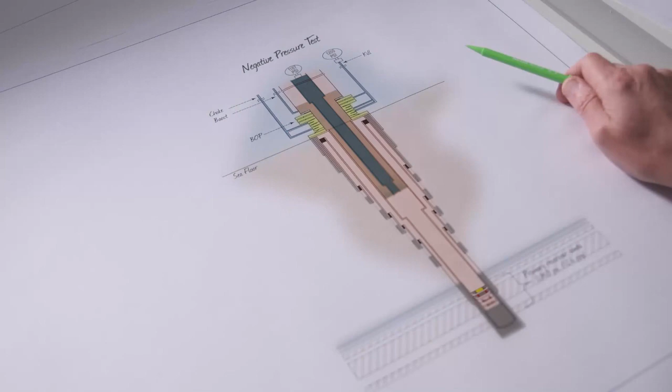They followed the spacer with 352 barrels of seawater, which should have displaced the tail end of the spacer to just above the BOP. They then closed the annular BOP. The U-tube pressure on the drill pipe was 2,325 psi.

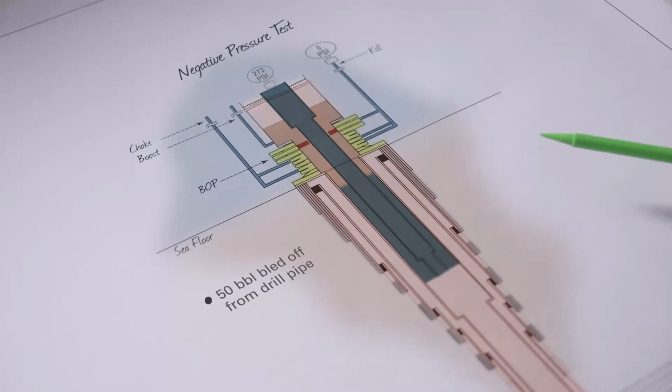Next, they bled off the drill pipe to try to get the pressure to zero. They bled off 50 barrels, which is 5 to 10 times as much as would be expected. This suggested something was not right. So after some investigation, they found the mud level in the riser had dropped, indicating the annular was leaking.

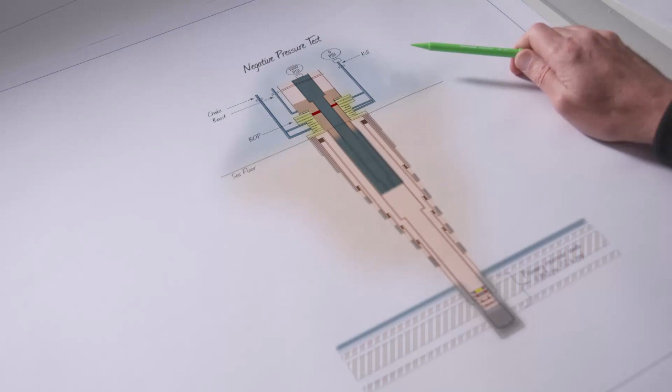So they increased closing pressure on the annular to make it seal, topped up the riser with 50 barrels of mud, and monitored the well to make sure the annular was now sealing. But now, instead of being above the BOP, the LCM spacer was strung out across it, and as we will see, this would have consequences later on.

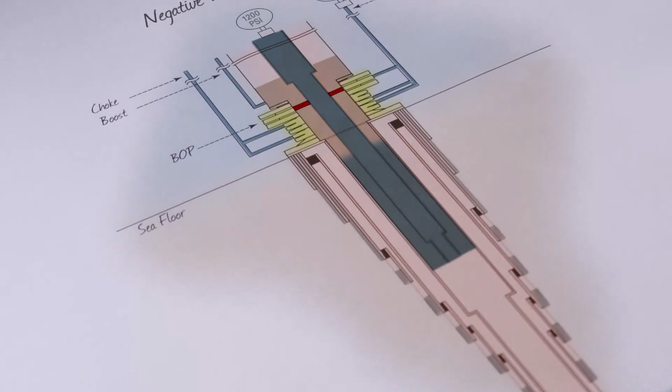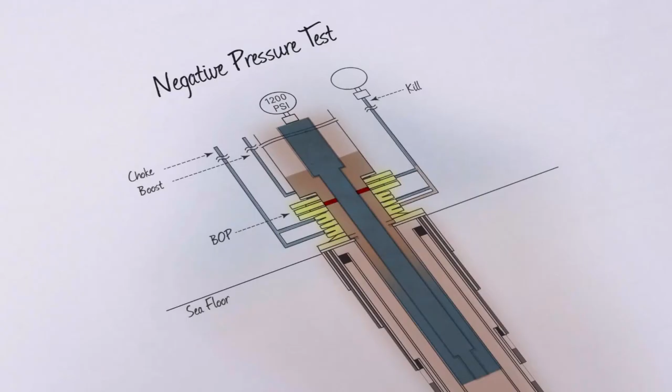With the annular sealed, they continued with the negative test. Drill pipe pressure at the start was 1200 psi. They bled off 15 more barrels, and the pressure reduced to zero, as expected. In fact, the bleed-off volume was the first visible indication of an integrity problem with the well.

But the volume rang no alarm bells because they hadn't calculated how much fluid was expected to be bled off to reach zero. The extra volume needed would have indicated that the test had failed, because later calculations showed that it should only have taken 3.5 barrels to bleed off the pressure, a quarter of what they actually got.

For the first time since those formations were drilled, the well was underbalanced and started to flow. The other 11.5 barrels bled off was an influx of hydrocarbons into the production casing through the shoe. They had in fact induced a kick. But the opportunity to recognize the kick may have been missed because of a procedural change.

The well site leader realized that to suspend the well in accordance with the permit, they needed to perform the negative test via the kill line, not the drill pipe. So they reset the test and essentially started again before the bleed-off volume was questioned or a rise in pressure in the drill pipe was noticed.

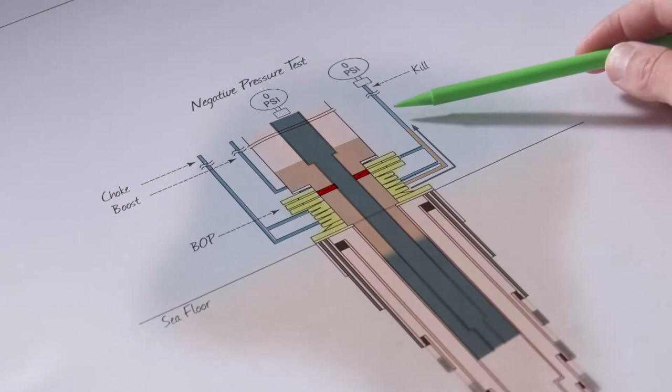Following the well site leader's instructions, they opened the kill line and observed some fluid coming out of it. Exactly how much is unclear. Some eyewitnesses said that flow eventually stopped, but others said that fluid was still spurting out when they closed the line. If the test was successful, there shouldn't have been any flow, as the drill pipe had been bled to zero.

They discussed the flow they'd seen and decided to open the kill line again, but first they rerouted it to the mini trip tank. They opened the kill line again and monitored it for 30 minutes, and this time there was no flow. But in the meantime, the drill pipe pressure built up to 1400 psi.

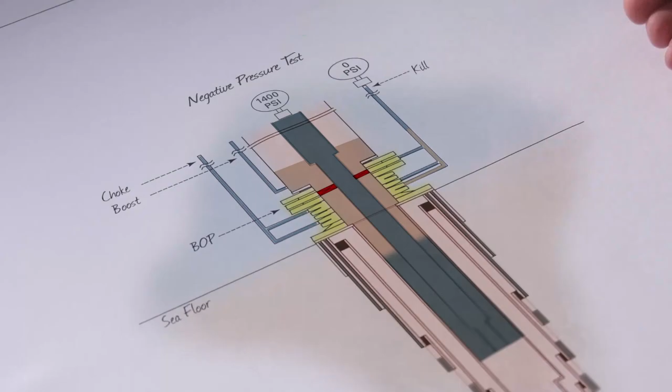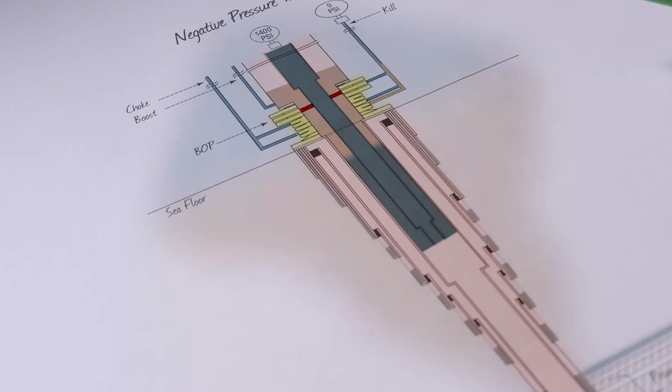If all was well, this would not have happened. The test did not apply any additional fluid, so there should have been no pressure source. The most likely source was a formation fluid influx. The well had flowed. The drill pipe and the kill line were both filled with water. They should have been at the same pressure. The readings didn't match this expectation, so the rig team tried to understand why.

This is a moment where a critical decision was made. With hindsight, these anomalous readings suggest that the test had failed and the well had flowed. To understand why the readings weren't acted on, we need to look at the decision-making process.

First of all, bear in mind that although this was a challenging job, everything seemed to be drawing to a satisfactory conclusion. All indications were that the difficult cement job had gone well. The floats had held, the positive test had been good, and there was no fluid coming out of the open kill line. The job was nearly finished.

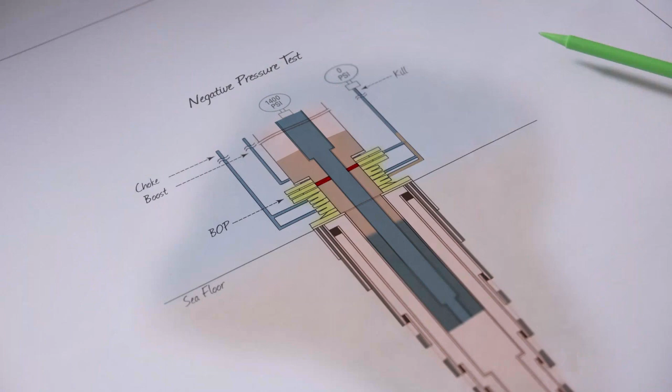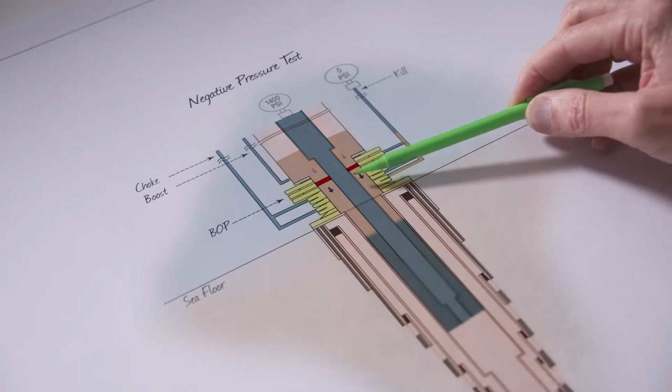There were 2 senior BP well site leaders supervising the negative test, and they had a discussion about the anomalous readings with the senior rig crew. And a Transocean tool pusher and driller offered an explanation, saying they had seen this phenomenon before, and it was called the bladder effect. The idea of the so-called bladder effect is that the heavy mud in the riser can exert pressure through the annular onto the fluid below it, because the annular is a flexible seal.

This appeared to explain the anomalous readings. With no fluid having come out of the kill line for 30 minutes, the negative test was deemed successful. This is one of the critical decision points in the series of events, because with hindsight we know that the negative test had failed and hydrocarbons had entered the production casing. Understanding this chain of decision-making is crucial to learning from the accident.

Note that the bladder effect is not known to exist. It's not a proven phenomenon, and in hindsight it was not a viable explanation for the anomalous pressure readings. This could have been confirmed by bleeding some of the pressure from the drill pipe. If pressure had started to rise again, it would have indicated the negative test had failed.

Instead, the well site leaders and the senior rig crew accepted the bladder effect explanation. There was a problem to solve. They had what seemed like a logical, convincing and benign explanation. Unfortunately, that explanation turned out not to be true.

Putting aside for a moment the events on the Deepwater Horizon, in our operations there are often situations where the observed data is hard to explain or contradicts what we believe to be happening. In those situations we need to be cautious of a phenomenon known as confirmation bias, which is the natural human tendency to focus on information that confirms and supports one's preconceptions, and to discount other information.

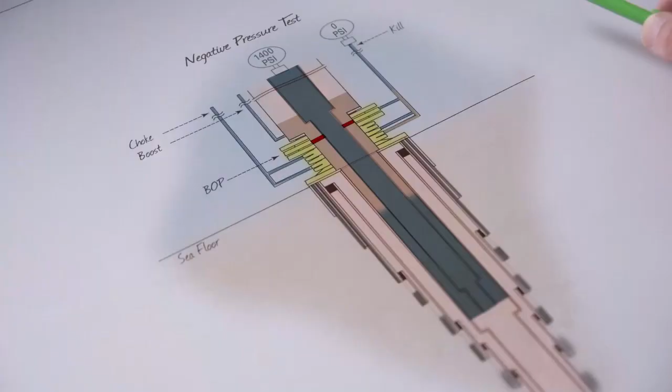We do not know why there was no flow out of the kill line. There should have been with 1400 psi on the drill pipe. If they'd seen flow, they would have known there was a problem. One credible explanation is that the kill line had become plugged with the LCM spacer that had leaked into the BOP through the annular at the start of the test. The spacer was an LCM pill made from Form-A-Set and Form-A-Squeeze, which is a thick, gungy, solids-laden pill.

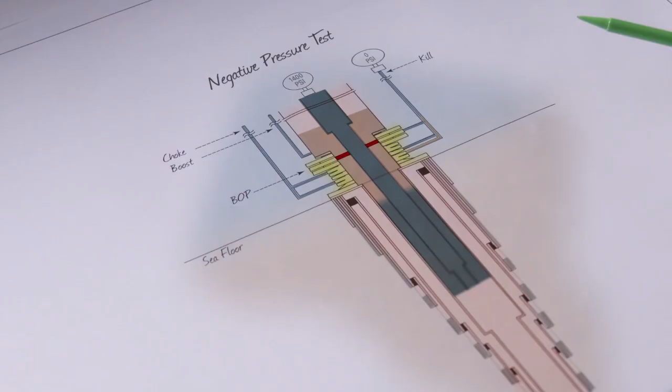It was used because it was in the mud pits, where it had been kept in case it was needed during drilling. But after drilling, they needed to dispose of it. And once it's been pumped down the well, regulations allow it to be disposed of overboard. So using the LCM pill as a spacer enabled this disposal solution. And of course, the LCM would not have been near the kill line if the annular hadn't leaked.

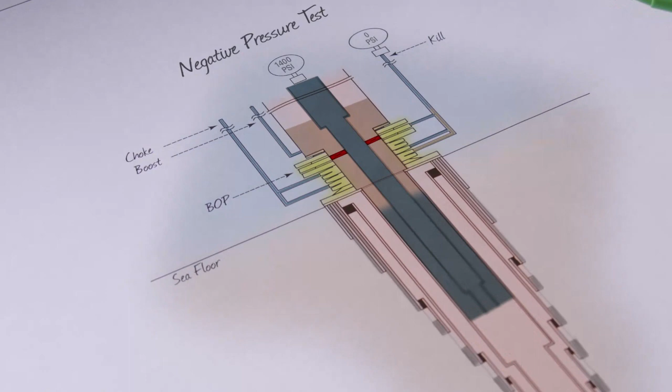It's also possible that when they rerouted the kill line to the mini trip tank, a valve was inadvertently left closed, so the kill line was never opened to the production casing pressure in the first place. We can't know for sure why there was no flow from the kill line. Certainly the type of spacer plus the leaking annular is a logical explanation.

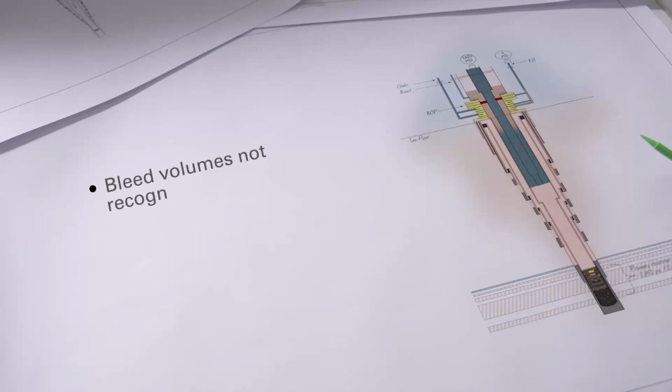The sequence of events surrounding the negative pressure test is one of the key findings of the investigation. The unusually high bleed volumes were not identified as a problem. The anomalous pressure readings, 1400 psi on the drill pipe and no flow from the kill line, should have rung alarm bells in the supervisors' heads. Instead, a possible explanation was assigned, but not tested.

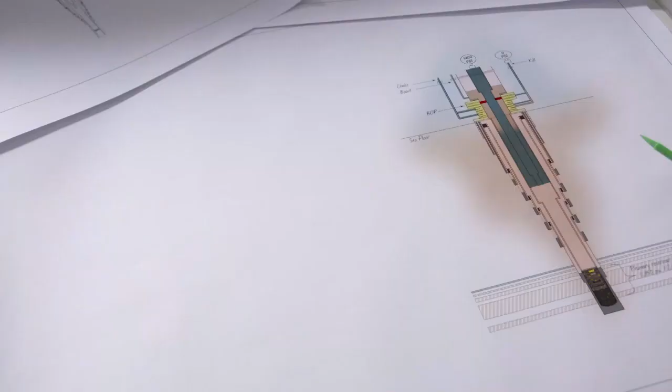The approved method of testing was not correctly identified before the test started, leading to the test being halted and changed halfway through. This confusion made it easier to miss the failure of the first test. The pass and fail criteria were not clear. The test was incorrectly accepted as successful, despite indications to the contrary. The decision to call the test a success, in spite of the pressure anomalies, was made on the rig, with little or no involvement from the onshore team. 3 preventative barriers had now been breached: the annular cement barrier, the shoe track, and the negative pressure test.

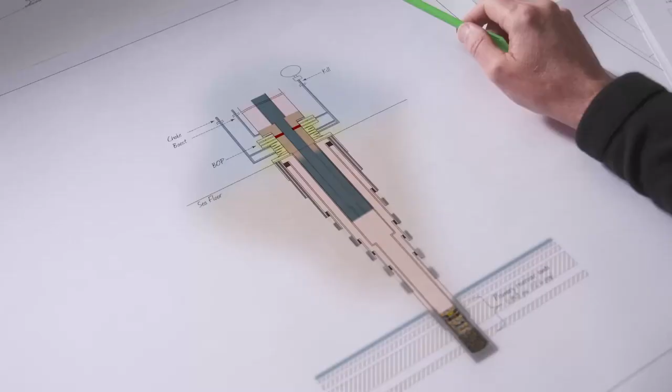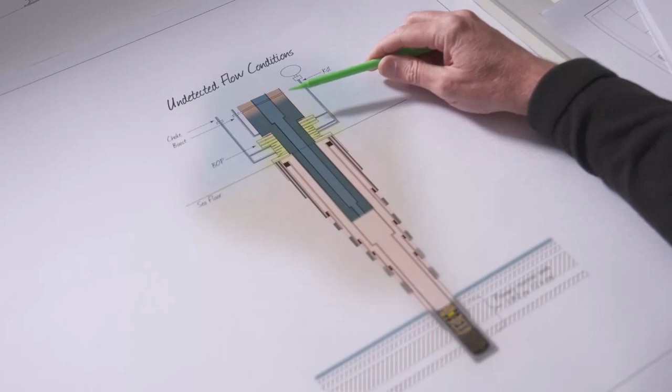After the negative test, at 19:55, the suspension program continued. With both the positive and negative pressure tests apparently successful, they opened the annular. As soon as they did that, the well was overbalanced again, so further hydrocarbon flow was prevented. At 20:02, in preparation for suspending the well, they began displacement to seawater to get the heavy mud and spacer out of the riser. The primary well control barrier included the mud in the riser that they were now removing.

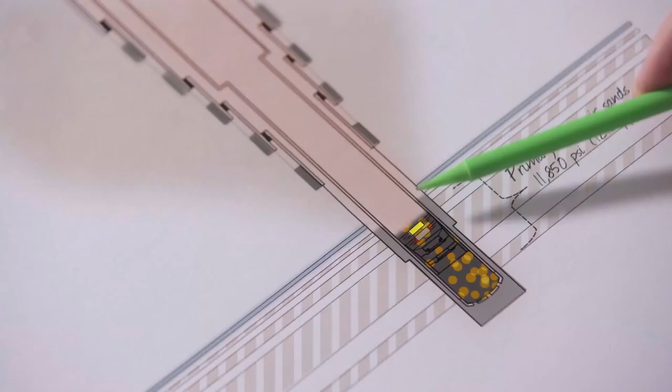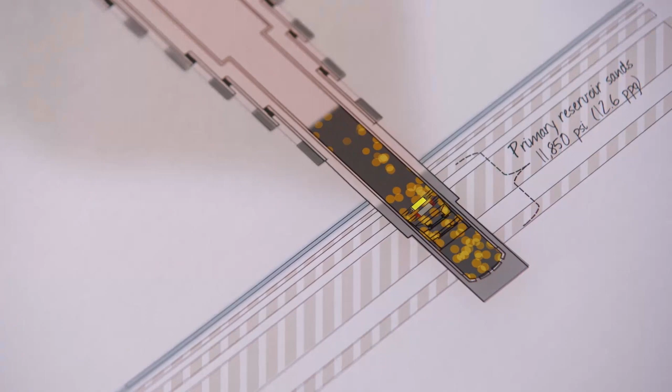50 minutes later, enough mud was removed for the well to go underbalanced. Hydrocarbons began to flow into the well again. Returns of fluid from the riser now exceeded inflow as the rising hydrocarbons displaced fluid up the well. The pit level started to increase. The pit gain may have been missed because at this point they decided to empty the trip tank down the flow line and into the active tank. So seeing a pit gain wasn't surprising. After all, they were adding excess fluid themselves. By emptying the trip tank when they did, they made effective monitoring of the well more difficult.

At 21:02, pressure began rising in the drill pipe. But as they were pumping seawater at a constant rate, and the mud in the riser was being displaced by seawater, the pressure should have been falling. It was rising because the lighter kick fluids were replacing heavy mud below the drill pipe.

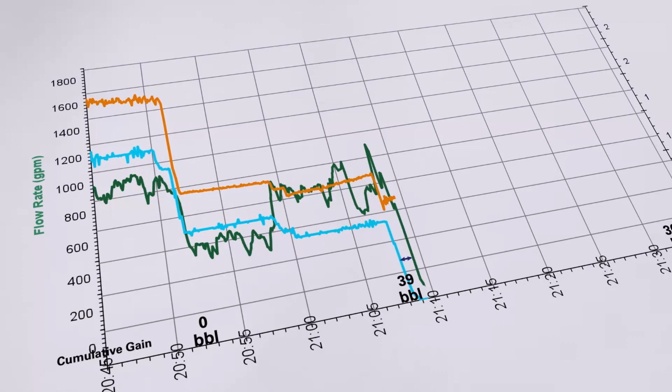By 21:08, the spacer was at surface, so they shut down the pumps so that they could do a sheen test to check there was no oil in the spacer before dumping it overboard. Two key things happened. Instead of stopping in seconds, as it should have done when the pump was stopped, the flow out of the riser continued for 1 or 2 more minutes, pushed by the rising hydrocarbons in the well. And the pressure in the drill pipe began to rise for the same reason. With the pump shut down, there was nothing on the rig to generate this excess pressure.

It was now 5 hours since the first influx during the negative test, and no well control actions had been taken. Remember, these were all smart, experienced professionals just like you. Things that seem clear in hindsight may have been missed in the efforts to finish a difficult job that appeared to be going to plan, given the cased, cemented and tested wellbore. Computer modelling suggests that up to this point the influx was relatively small, perhaps 30 or 40 barrels. The influx was flowing at quite a slow rate, but it was accelerating.

At 21:15, with the sheen test complete, the pumps were restarted. Because there was believed to be no risk of oil contamination, flow was rerouted straight over the side. At this point, there was no way to monitor flow volumes or rates out of the well. As they continued pumping, the pressure continued to rise steadily in the drill pipe, and the most likely reason for this was that the well was flowing. But no well control actions were taken. All the returns were now going overboard.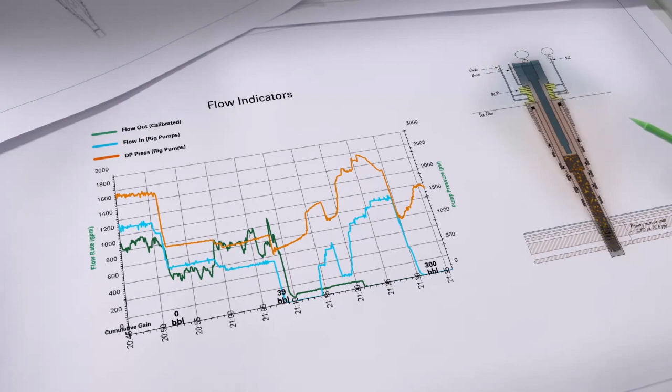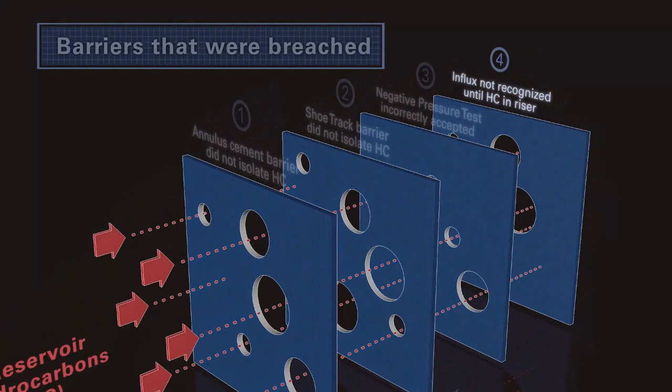At 21:30, they stopped the pumps. While they were off, the drill pipe pressure climbed by more than 550 psi in 5 minutes. The investigation indicated that the well must have been flowing at an increasing rate. Though eyewitnesses reported there was a discussion on the drill floor about differential pressure, no well control actions were taken. Subsequent computer modelling put the total influx at this point at around 300 barrels. A fourth barrier to the accident had now been breached. Lack of effective well monitoring meant no one recognized the influx.

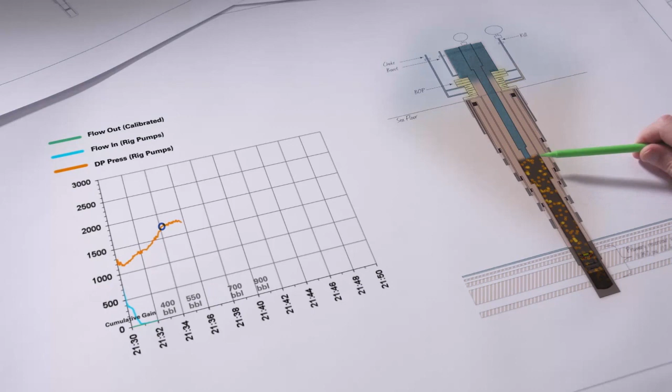With the pumps off, at 21:34, you can see that the pressure in the drill pipe stopped rising. This was a bad sign because it indicated that the influx had now reached above the end of the drill pipe. That was more than a 550 barrel kick. Although people on the rig floor were concerned about the differential pressure, still no one took any action to shut in the well. Concerned by the pressure in the drill pipe, the driller apparently tried to bleed it off, and you could see the pressure drop rapidly. But as soon as they shut the bleed off, the pressure immediately increased almost back to where it had been. The well was flowing. The rate of flow was increasing, but all the returns were going overboard, which made it more difficult to recognize the flow.

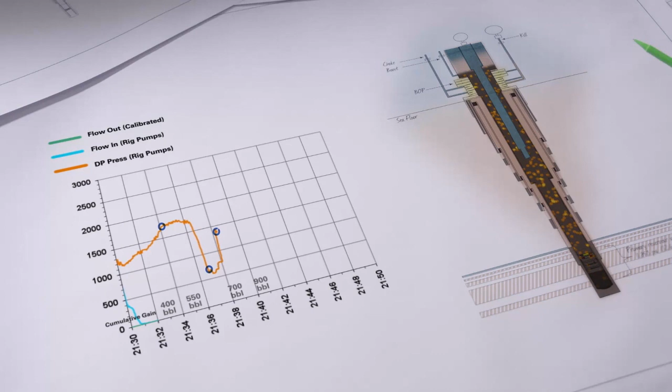By 21:38, the kick size was calculated to be 700 barrels. The influx was now in the riser and above the BOP. This was an absolutely critical moment. The BOP could no longer prevent the explosive hydrocarbons from reaching the surface. At 21:41, mud and fluids being pushed up ahead of the hydrocarbons overflowed onto the rig floor. A minute later it began to shoot up the derrick. Witnesses described it as being like a waterfall raining down from the rig floor to the deck below. Based on the lack of response until this point, this appears to be the first time a well control problem was recognized. It was 3 minutes too late to stop the hydrocarbons entering the riser with the BOP. That barrier had already been breached.

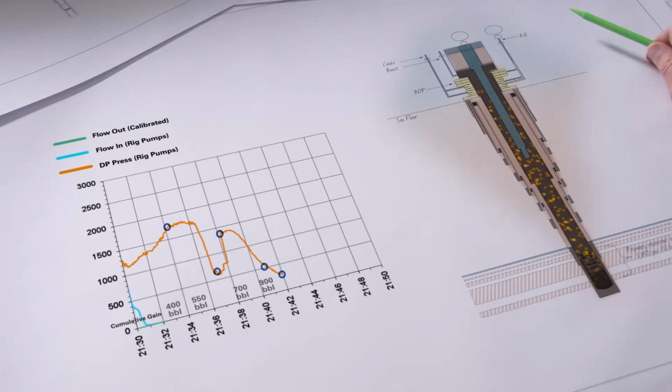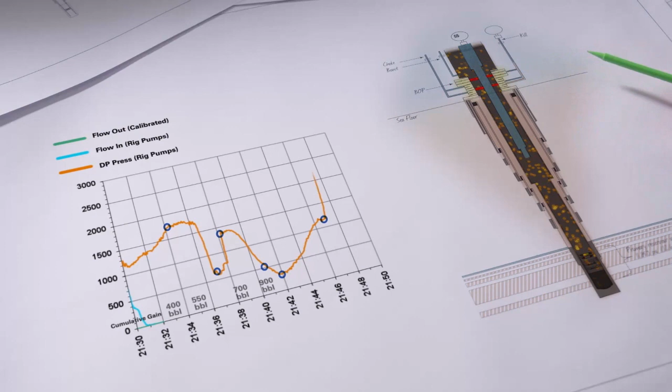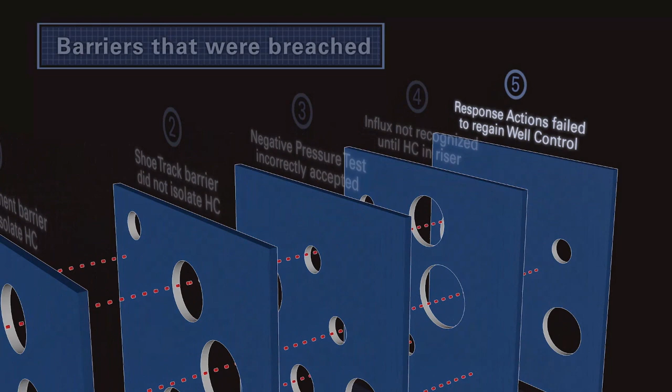If the influx enters the riser, the BOP can no longer prevent it from reaching the rig. In this case, it could still possibly have reduced the severity of the blowout, but it wasn't activated soon enough. The fifth barrier to the accident had now been breached. The response actions, when they were taken by the crew, failed to regain control of the well because the hydrocarbons were already above the BOP.

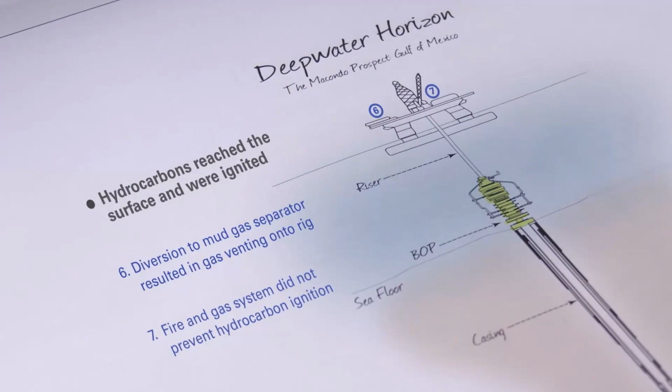Now we will look at the third critical factor, that hydrocarbons ignited on the Deepwater Horizon. To stop mud from raining down on the rig floor, they closed the diverter. It was the right action. It's what it was designed for, to keep the fluids off the rig floor so they could regain control. Unfortunately, the diverter was lined up so that instead of going overboard, the returns went to the mud gas separator.

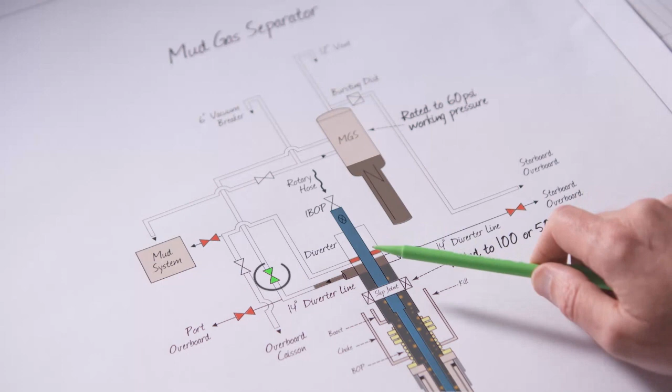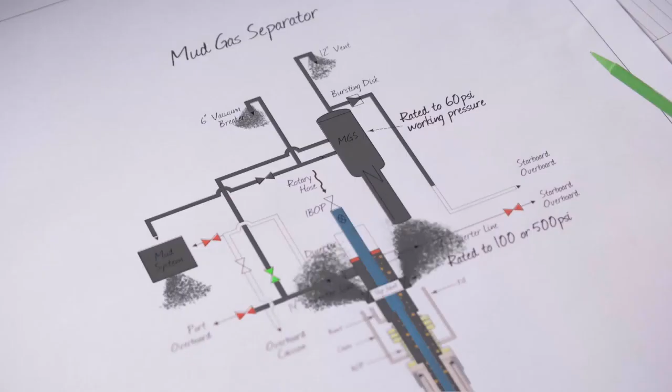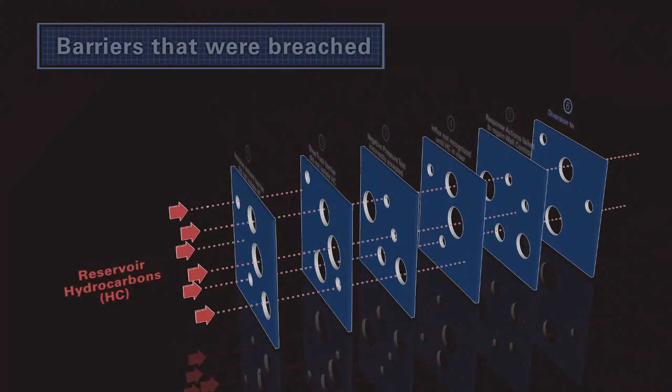The MGS is a low-pressure, relatively low-volume vessel. The flow rate from the well, which is estimated to have peaked at 165 million standard cubic feet a day, was so high it simply overwhelmed the MGS. Hydrocarbons poured from the derrick vent into the mudroom and from the rupture disc, and most likely from the slip joint as well. Within seconds, flammable gases would have covered most of the rig. Thus, the sixth barrier was breached. Diversion to the mud gas separator resulted in gas venting onto the rig.

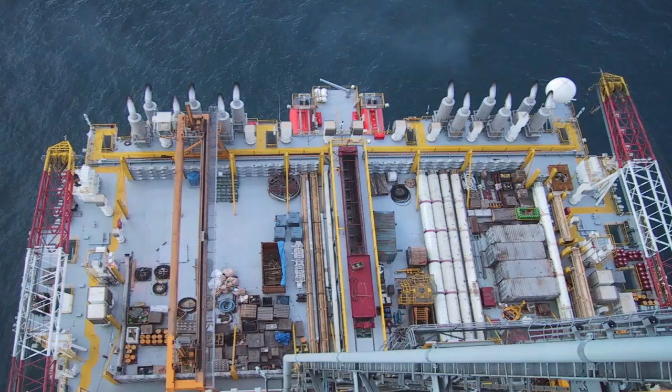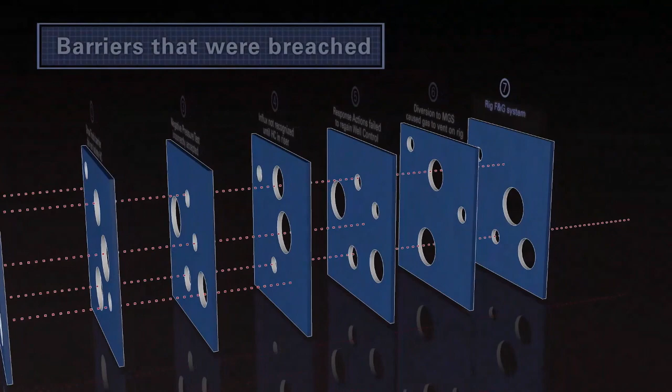The first explosion occurred at 21:49. We don't know the source of ignition, possibly one of the engines or a piece of electrical switchgear. But clearly the fire and explosion prevention systems, although they may have detected the gas cloud, did not prevent ignition. Eyewitnesses reported that at least one engine went into overspeed before the first explosion. This was the seventh barrier that was breached. The rig's fire and gas system did not prevent hydrocarbon ignition, leading to the fire and explosions and loss of life.

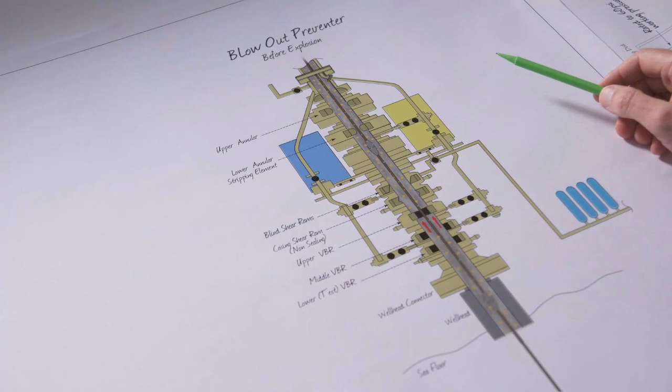Now let's look at the fourth and final critical factor. The emergency well control system did not seal the well. As well as causing major damage to the rig and serious and fatal injuries, the explosions appear to have damaged the MUX control cables to the BOP. At this stage, an annular was already closed, and likely one or more VBRs. With damage to the MUX and hydraulic connections between rig and BOP, the annular would gradually relax open as hydraulic pressure fell. But the VBR would have remained closed. However, the VBR didn't hold.

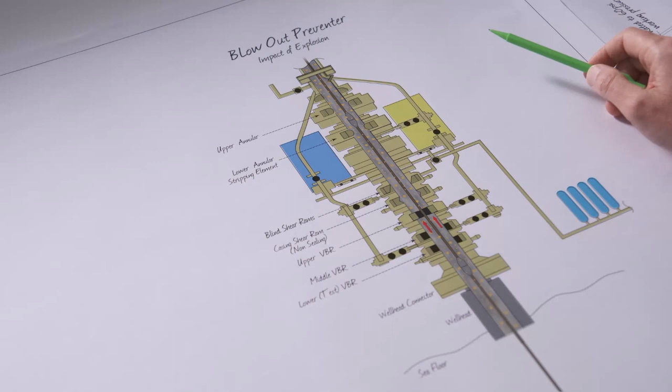The problem was that the explosion blacked out the rig, and because the Deepwater Horizon was dynamically positioned, it began to drift off location. At this point, the seal on the BOP was broken, and uncontrolled flow from the well resumed. There are two possible reasons for this. Either the drill pipe was parted, opening up a pathway inside of the VBR, or alternatively, the drill pipe was dragged through the closed VBR until a tool joint reached the ram and damaged it. Either way, uncontrolled hydrocarbon flow was again feeding the fire on the rig.

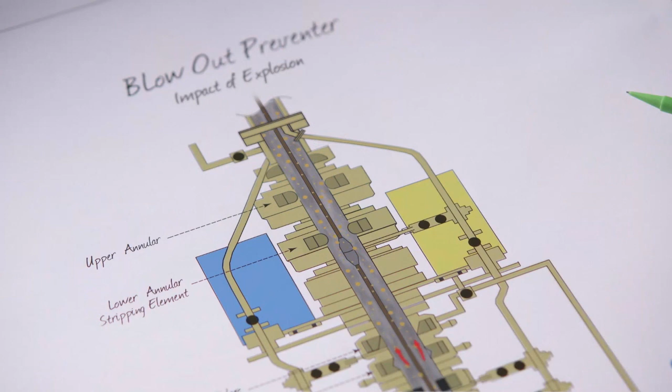At this point, the crew triggered the emergency disconnect system to activate the blind shear rams and disconnect the riser. But this relied on the MUX cables to function, and they had already failed, so the EDS did not activate. When the MUX cables or hydraulic lines failed, the automatic mode function, AMF deadman system, should have automatically triggered the blind shear rams and sealed the well. But this did not happen. Why?

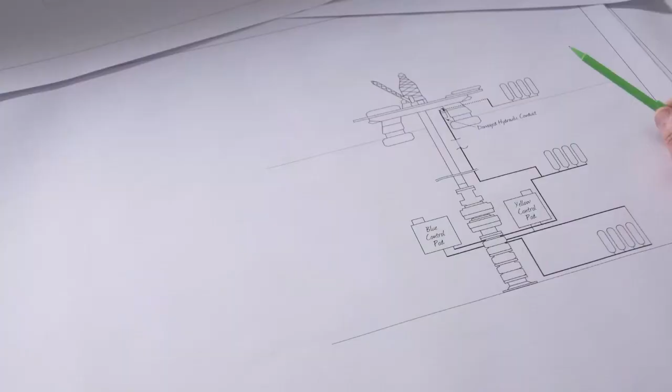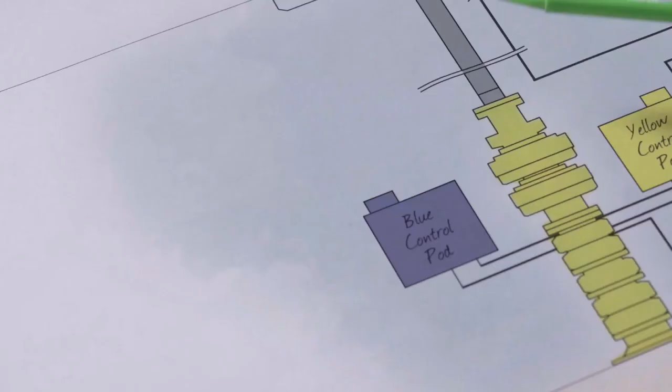The AMF was controlled by two redundant pods. These each contain two 9-volt batteries that power the control electronics, and a 27-volt battery that triggers various relays and ultimately a solenoid valve to release hydraulic fluid to operate the blind shear ram. When the pods were later recovered, the investigation discovered that in the blue pod, one 9-volt battery and the 27-volt battery were either flat or largely discharged to the extent that they could not power the AMF.

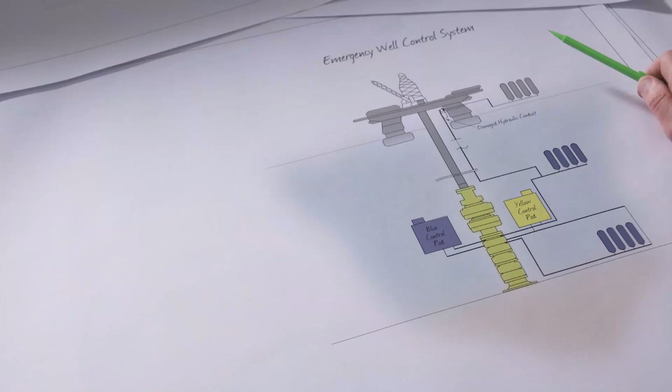In the yellow pod, the batteries were healthy, but a solenoid valve control system had been incorrectly wired during maintenance, so the AMF failed to operate. So, although the AMF had dual redundancy, both control systems failed to operate for different reasons. The AMF deadman system was the last line of defense to shut the well in.

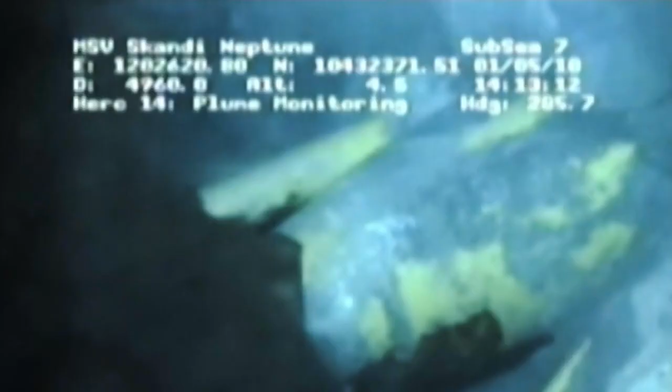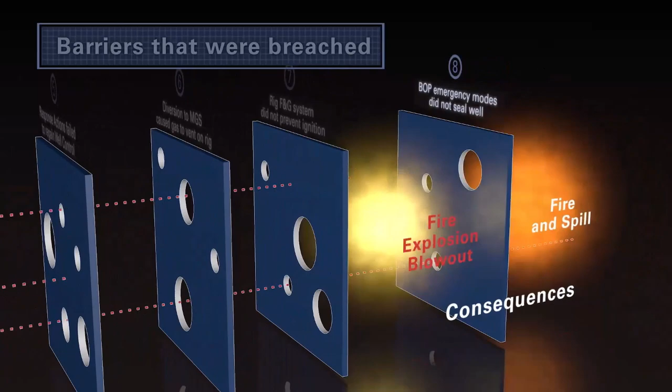Later attempts to trigger the AMF manually using an ROV appeared to succeed, but failed to seal the well, possibly because the drill pipe was off-center in the BOP, or because the low pump rates of the ROVs at that time caused the sealing elements of the ram to be washed out before a seal could be made. The Macondo well was now discharging oil into the Gulf of Mexico, and it would continue to do so for 87 days. This was the 8th and final barrier that was breached. The BOP emergency mode didn't seal the well.

We must remember the mechanical and operational failures that led to the tragic loss of 11 men and one of the largest accidental oil spills in U.S. history, and make sure we do our part to never allow those or similar failures to be repeated.